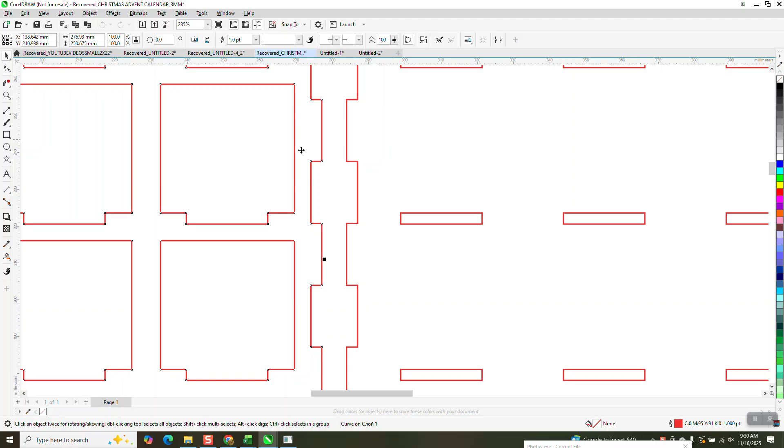Somebody sent me this file. It's an advent calendar. A little confusing on how it all goes together. I hope it came with plans. She bought it and it came in for 3 millimeter plywood. But if we look at the red lines, they're 1 point. So that won't cut. Now the black lines are 0.5 point, which will engrave and look pretty nice. But we need to change.

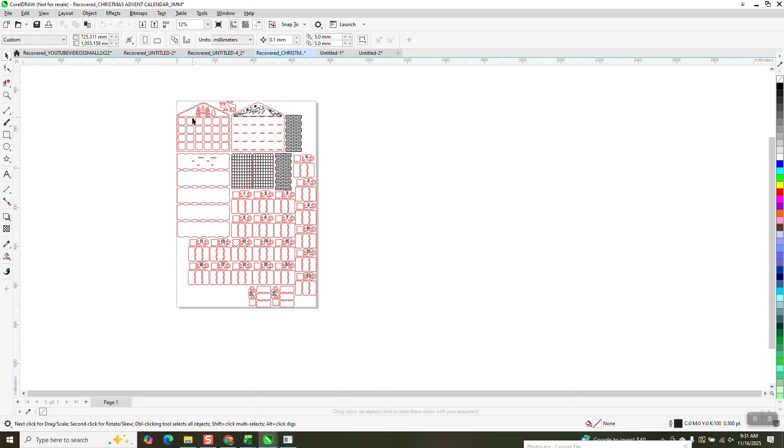She got back to me this morning. She's got 3 millimeter wood. So these items right here are going to be cut out, and these items are going to be cut out, where these are going to be engraved. So we need to change all the red lines to hairlines. Maybe I don't even have to ungroup it. Maybe it'll do it. Let's test it out.

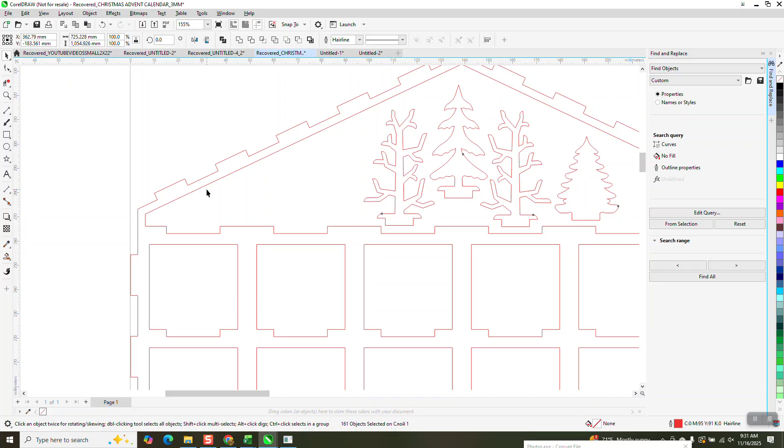I'm going to pick on a red line, and you see down here we got red lines, CMYK, which really needs to be changed, but it's 1 point. We're going to go to edit, find and replace. And because I have that red selected, I'm going to go from selection and go find all. And then I'm going to go up here and turn them into a hairline. So that makes it a hairline, but I'm also going to right click on RGB red.

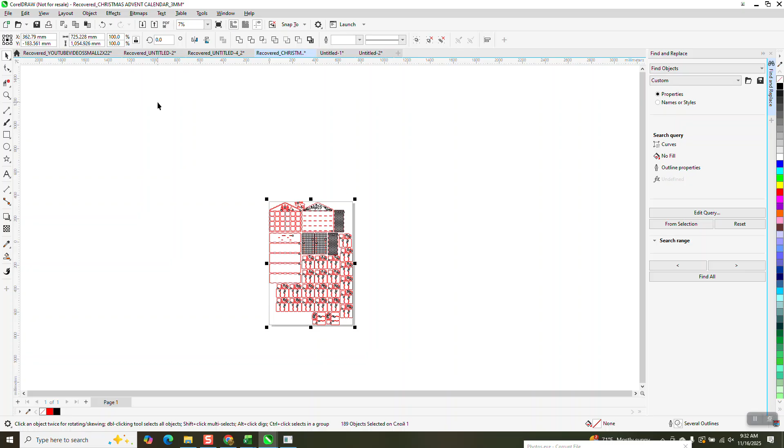And we probably need to check the black. The black will engrave better if it is, see, it's CMYK. So it's an outline, so I would right click RGB and then save that. But this is a lot of cutting. Let's change it to inches real quick. This thing is 41 inches. That's a lot of cutting.

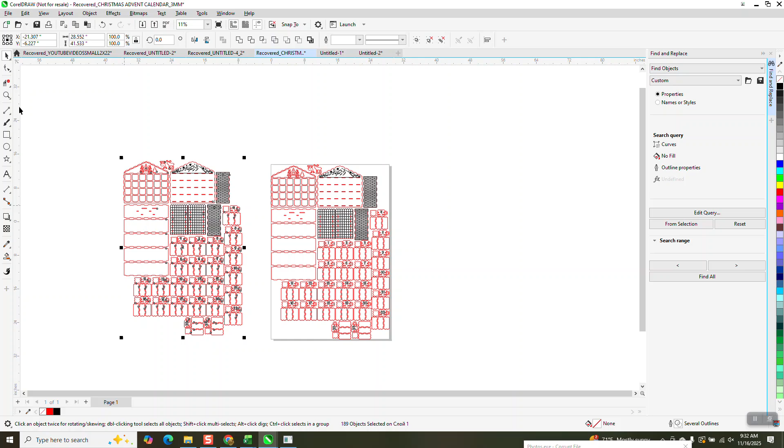So before I would cut it out, I'm going to test. I'm going to make a duplicate of that by hitting the plus key on the keyboard. And then I won't mess up this if I mess it up. And I don't really understand these two. These must be different ends of the calendar. But we need to find something that's going to fit together. So these two pieces are going to fit together. I'm going to click off that, click on it.

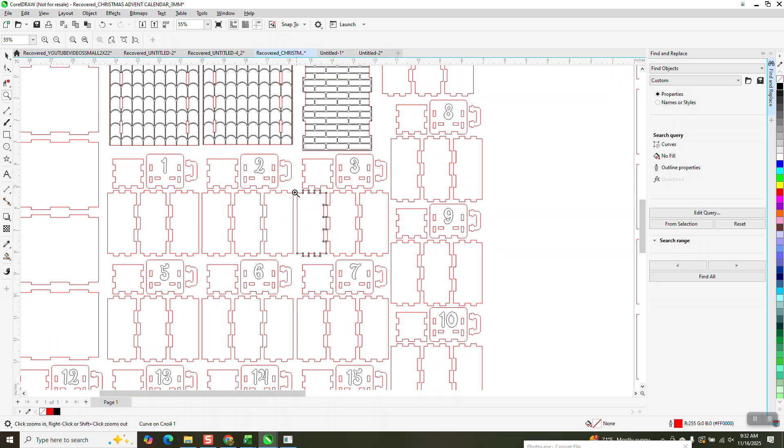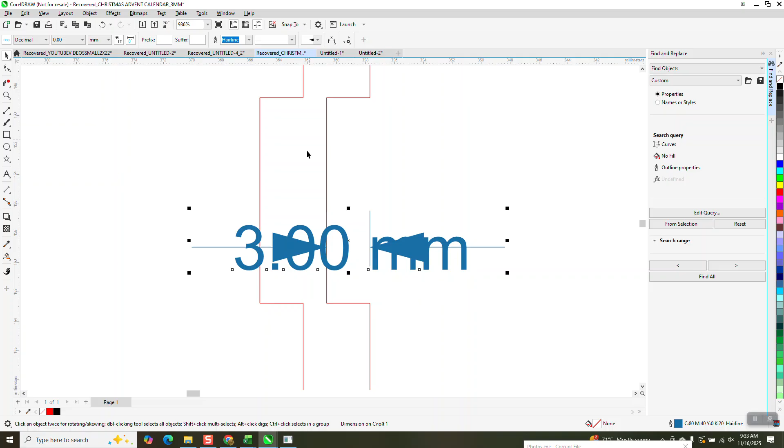Now, she's got 3 millimeter wood. Let's change our units back to millimeters. I'm going to zoom in here, and I'm going to get the parallel dimension tool. The thickness of the wood is this part right here. So if we look, it's 3 millimeters, so that's perfect. And she asked me about the kerf. Kerf doesn't really have anything to do with this.

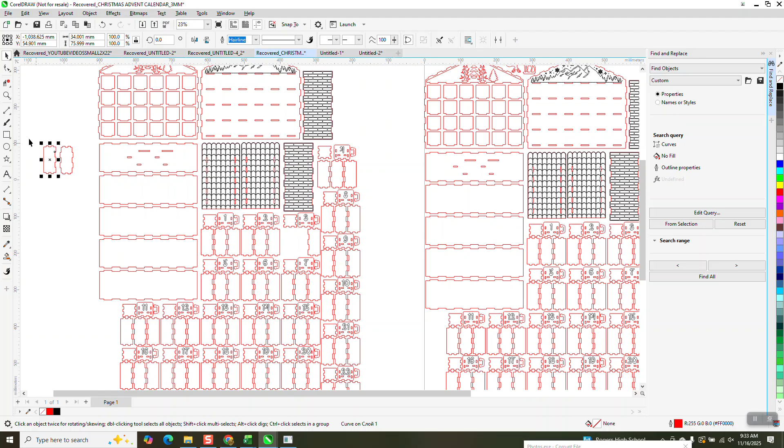I'm going to take this and just kind of transpose it into here. Let me get it right on the money. See, the kerf is going to take that away. So the two lines are perfect. Now, like I said, before I would cut this out, and the reason I made a copy, I'm going to take that piece right there and that piece right there. You could cut out those two pieces, but you could save a few steps. See, those are the same. Really, you only have to test these.

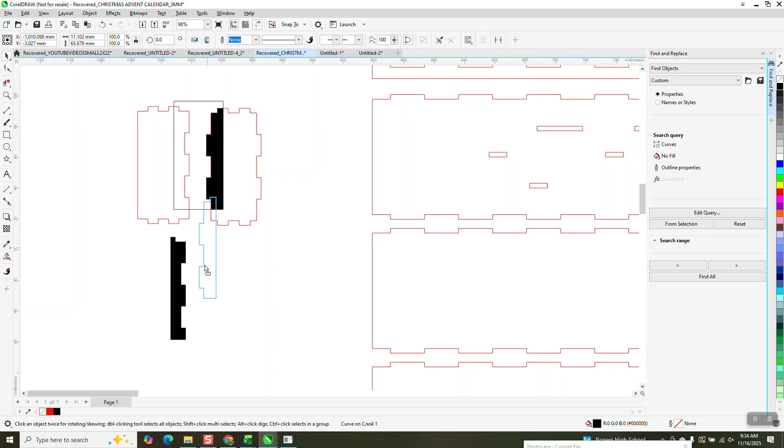Take a rectangle, take your Smart Fill tool. Smart Fill tool does not add any thickness to the item. And I would cut out these two pieces. So what I would do is left click, no fill, right click outline, and make sure it's a hairline. She evidently draws it in half point. Make sure it's a hairline.

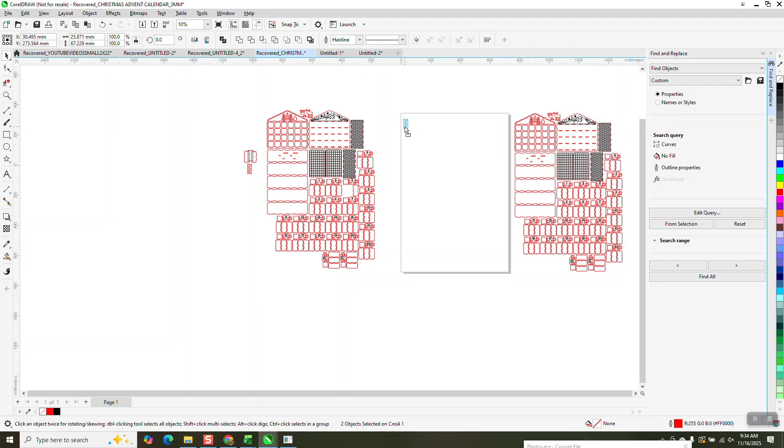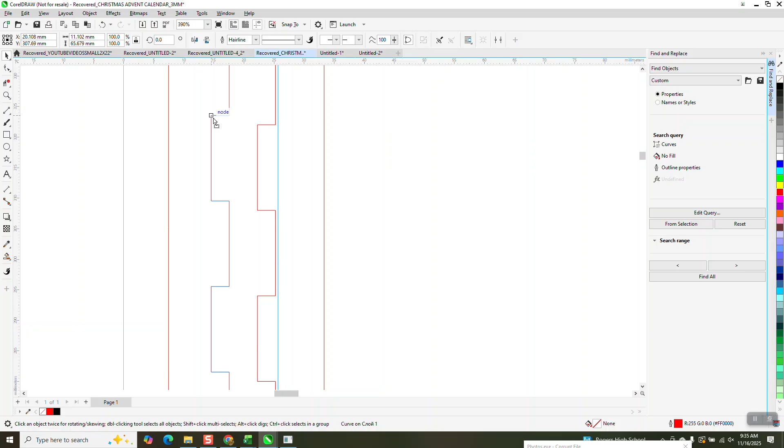Then take this off to your laser bed. Your laser bed probably goes the other direction, but take these two pieces and give that a test cut. You won't waste any wood. And then that way you'll know if they fit. They should fit. The 3 millimeter again is the thickness of the wood, which is this. This is on the box joint. This is just to make sure these two pieces fit. If you'll do these test pieces, this would be a lot of work to change the kerf. Hopefully it's going to fit.

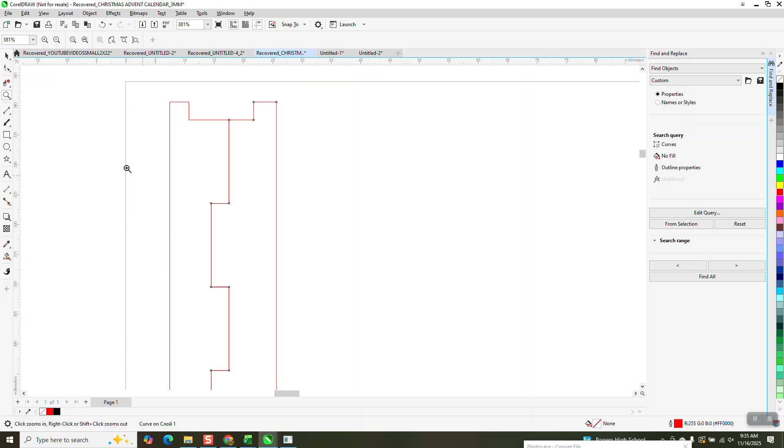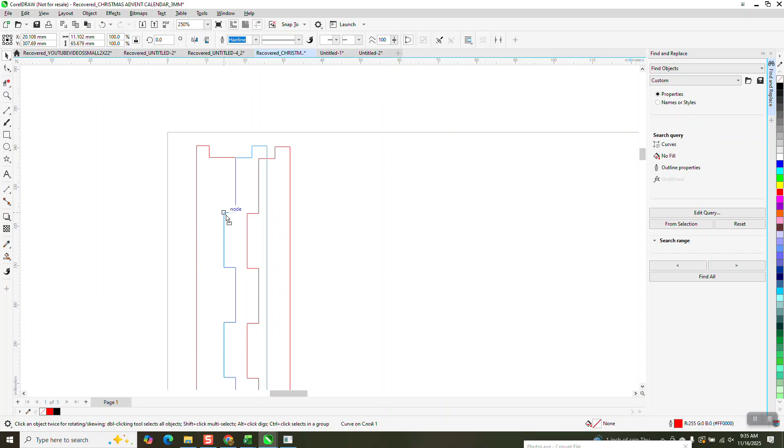Whenever you have two lines on top of each other like that, the kerf of your laser, like my laser is like 0.003. So when you cut both those, it's going to be like 0.006 maybe, but it should fit together. If it's too loose, that's kind of a problem. You want it snug. You don't want it too snug where you're going to break the pieces off. But if it's too loose, let me know and we'll see how we can figure that out. Of course, that'd be a lot. There's a lot of joints.

If we look at this joint right here, the main thing for the video is to make sure that you have that joint right there. That's a 3 millimeter. So that's the thickness of your wood. It's going to have to go down in. Matter of fact, I would have maybe even cut that piece out with a piece that's going to go in there, which would be probably this one. Anyway, I hope that helped a little bit.